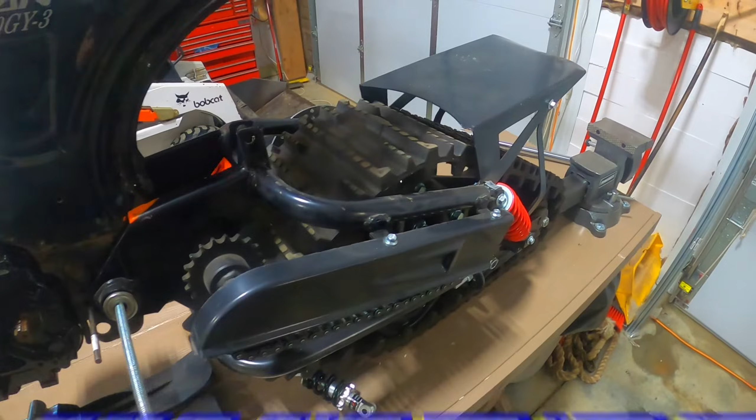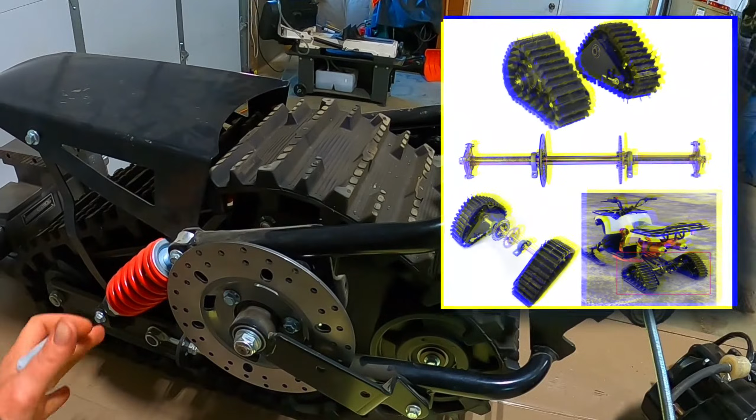So now, here is my new toy that I got. Yeah, I'm not seeing a lot of these online. I think I kind of lucked out. I was planning on taking one of those snow tracks off of a go-kart. I think Grind Hard Plumbing Company did that with their Barbie car.

I was about ready to build a swing arm pretty much exactly like this. I kind of had it in my mind. This is exactly what I was seeing in my head, how I wanted to build it. But as I was going to order that guy, I found somebody already made a snow bike kit for the little kids 110, 125cc snow bikes.

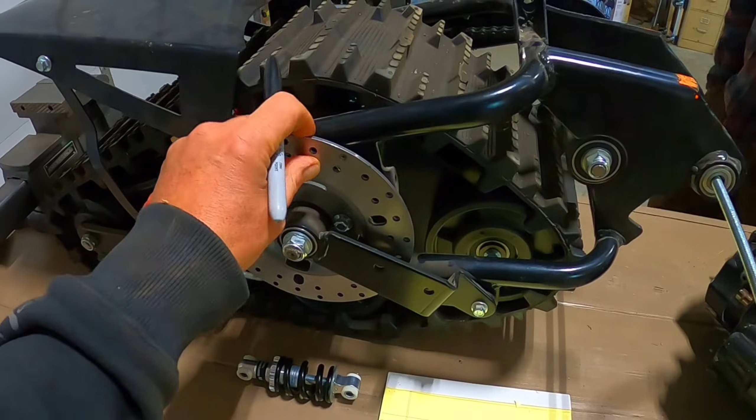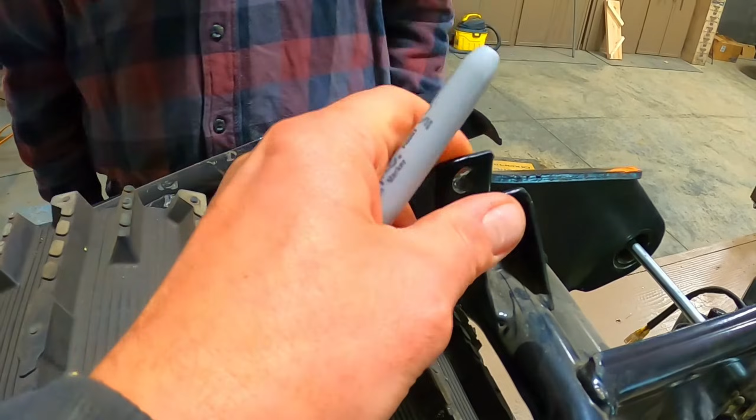So what do you think, this guy here? Well, it looks like it's made in China. Yeah. But, you know, it looks serviceable. These welds aren't good, and this bracketry for the monoshock is just a little light. The fender comes pre-bent, I see. Yeah, it came off the slow boat from China, and it was laying inverted, so all the weight was on the fender, so this is all bent up. But yeah, nothing we can't fix.

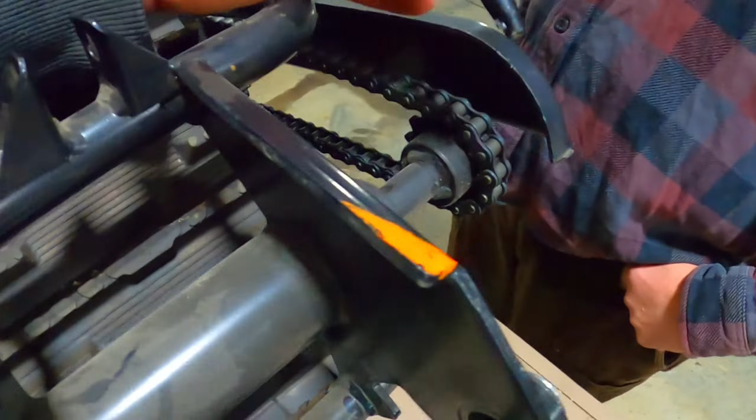It's kind of cool. Got a nice little disc brake here, little shocks to, oh, it looks like to give the snow track a little bit of flex. Here's your tensioner for the thing. It's got a jack shaft built into the guy with some gear reduction, so this guy will come off the sprocket on the engine and drive the jack shaft. Let's get around to the other side and take a look at this thing.

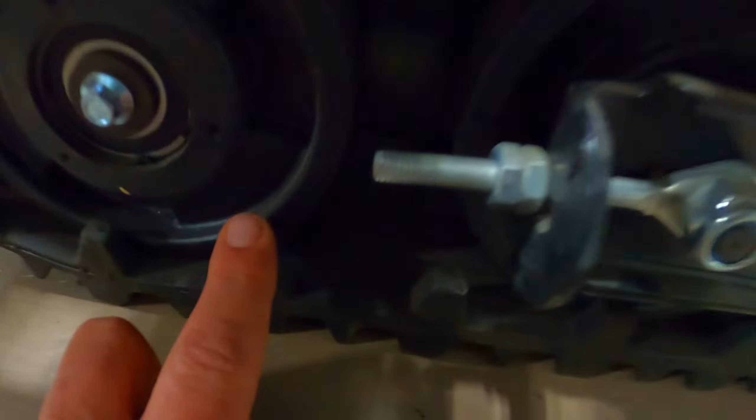Yeah, that's what my buddy was saying. Yeah, it looks like a pretty good design because there's 1, 2, 3, 4 rollers. Here's a tensioner between these 2 rollers to tension the belt. And these big old knobbers down here. So we don't think we have to worry about this tread ever falling off.

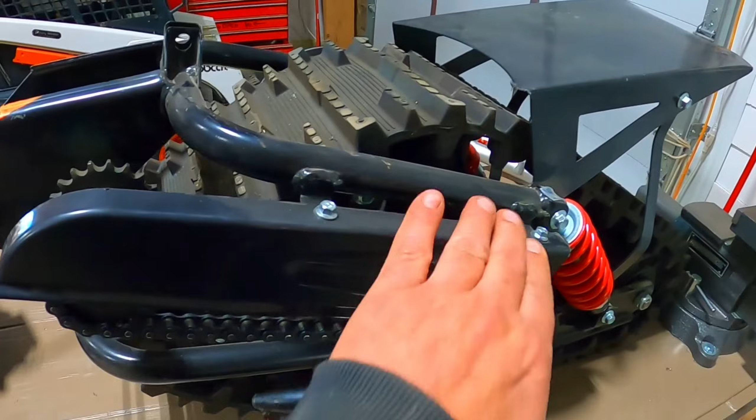So it's got an iffy little chain guard right here. I'm not sure about this. I might make my own new chain guard here and cap this in, because I don't want the chain breaking and blowing my leg up.

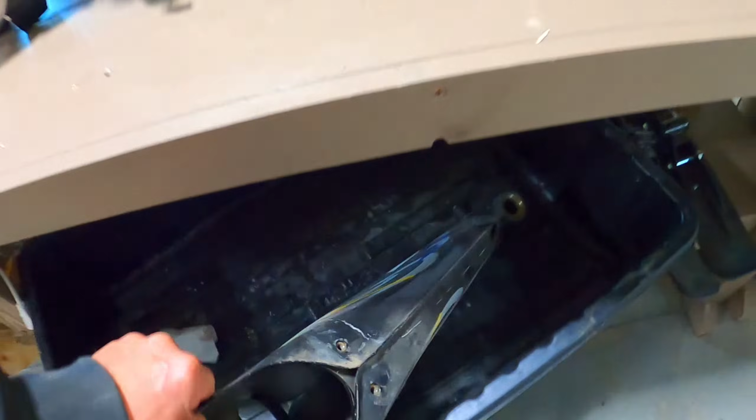So the plan here, instead of making like a Timbersled or a full-size snow bike, I'm going to do this. I have this knockoff Trail 70 frame. It's a Lifan LF110GY-3. That's a heck of a name. So I stripped this thing out to build my 1972 Honda.

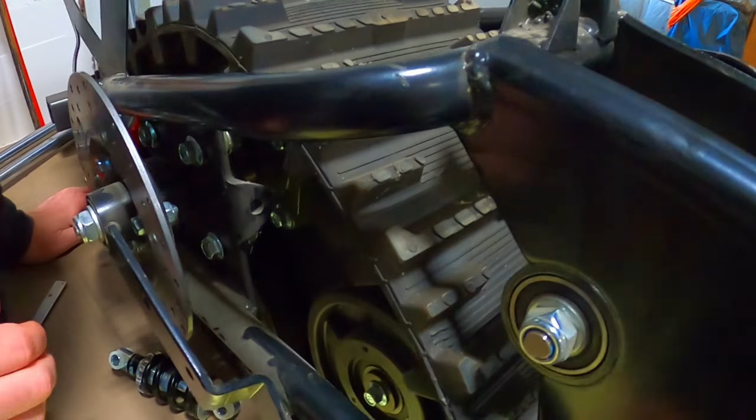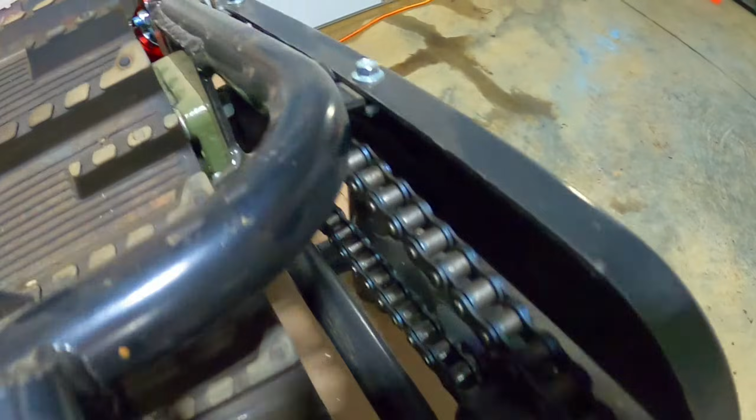What'd you find out there? Well, I was looking at this shaft running through the middle here that runs the disc brake and comes off the jack shaft. Okay, so the brakes are actually on the jack shaft itself. And this side has a tensioner to tension up this chain so you don't get flop in it. But on this side, it's solid, even though there is a space to put a nut through there. Oh, they probably use the same bracket on both sides, same tooling. Oh yeah, I can see the tensioner right back there.

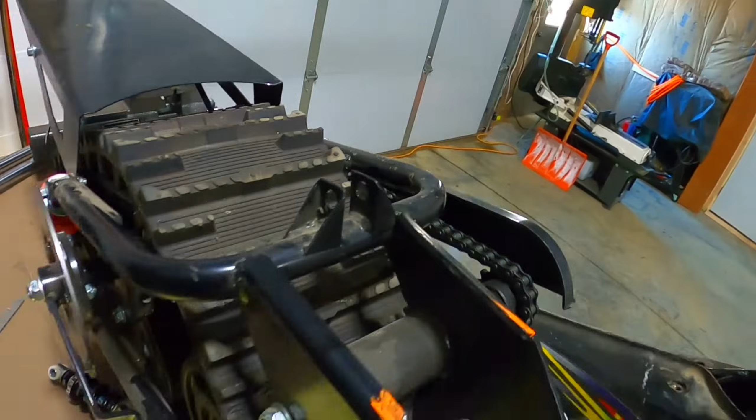Neat. So yeah, definitely want to keep that chain maintained, or maybe put a decent chain on there, because if that's the brakes, I don't want that to go snap and have zero brakes. Zero brakes. I got to figure out what kind of caliper I want to use here. Do I want to use hydraulic or just a mechanical cable? I like mechanical cable. I think so, because then you don't have to contend with leaks.

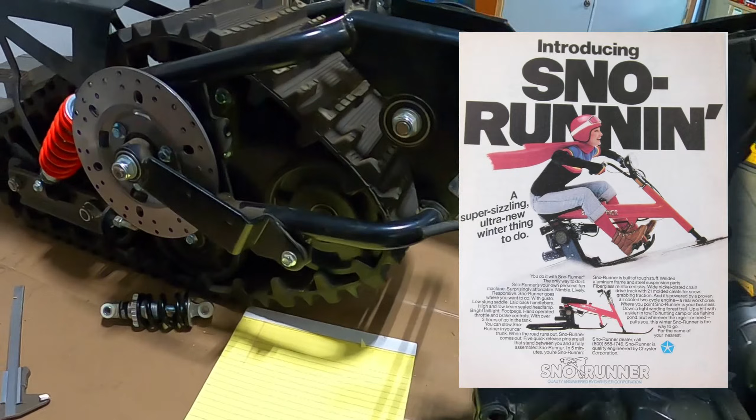And the thing is, this thing's not going to be like a 50-mile-an-hour machine. It's going to be a little putzer thing, kind of like those Chrysler Sno-Runners, just a bigger version of that. So I think what I'll do is see if I can find something off a kid's pit bike, mechanical caliper, maybe actually even 2. I could probably mount one here and one down there, so I could have a handbrake on both sides of the handlebars, a little bit of redundancy.

Oh, and the motor. This is kind of a funny story. Dad was at the dump, I can't remember where it was, and this was just kind of laying there. So we got this thing for free. He brought it home, wasn't getting any spark. So we pulled off the side cover here, and the stator, I think, grounded out to the flywheel because there was a big old spark and burnage inside there.

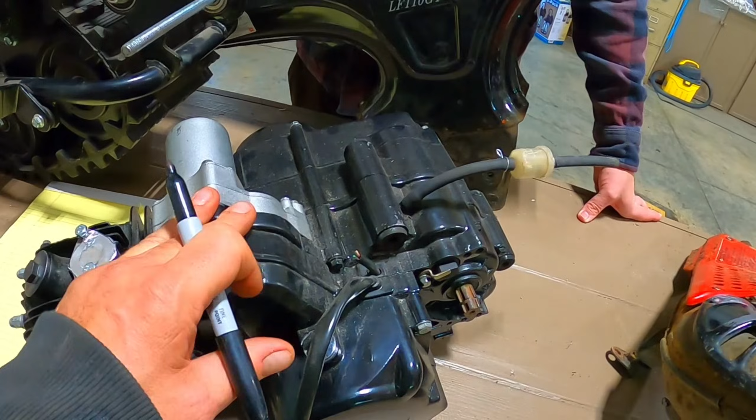So all we had to do with this thing is put a new stator, new flywheel on it, and we got a free 110cc electric start engine off of, I'm assuming, a kid's Chinese quad. And it's kind of funny. It's a single speed forward and reverse. So that's all it's got. So I think it's going to be perfect for this thing because we're not going to want to go 50 mile an hour on this little thing.

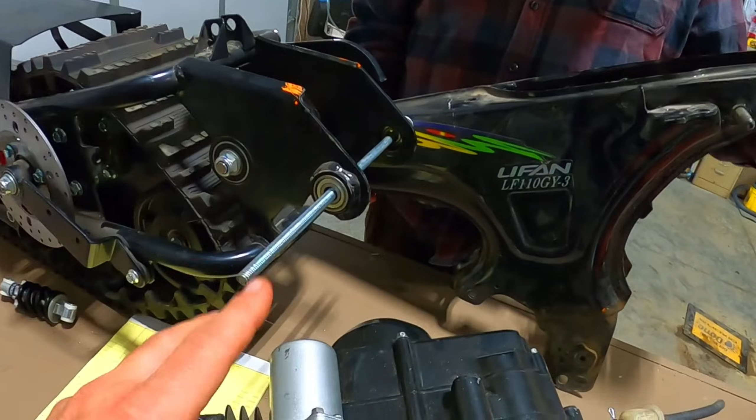So I think first step, I'm going to use a single speed engine on here and use it as a test bed. And down the road, if I want more gears, I do have a couple more Chinese Lifans. I think I've got a 4-speed semi-auto 125 and a 4-speed manual clutch 110 I might put in it. But for now, the single speed is going to be the test motor. I think it's going to be the perfect fit.

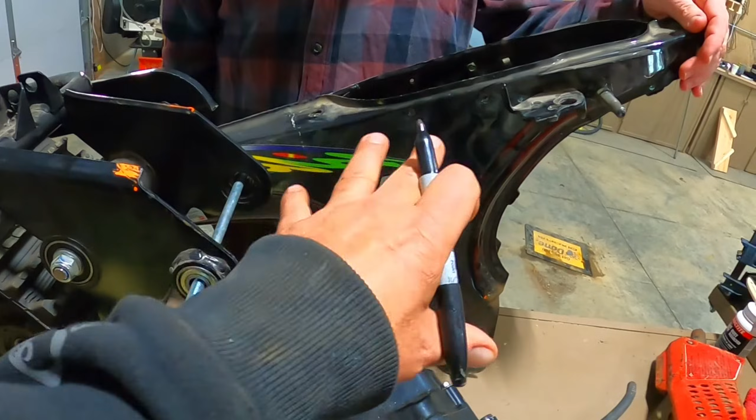All right, so let's take this little carriage bolt here, it's our swing arm pivot, and let's walk through this whole thing and see if we can get an inventory of all the parts I need to order.

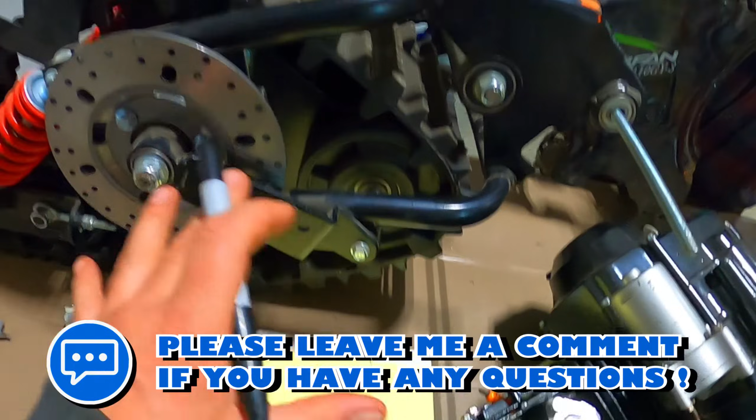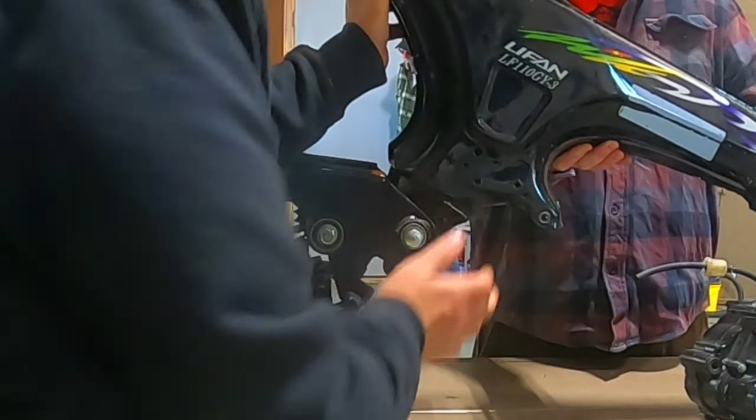Oh, look at this. Oh, I think a couple washers in there to shim that out, and we're gonna be in business. Installed. All right, what do we got here? Just a couple pieces of rod. Now, I will lift the motor up. If you can put those rods in here, we'll see if we can get this guy.

I will do it. You know, I love getting these things into these stamped frames. It's so freaking easy to do. Oh, there we go. I think that's good enough for today. And watch the whole thing come crashing down. Yeah, look at this though. I'm thinking I might keep this frame black, the engine black, and the swing arm black. This might be pretty sharp.

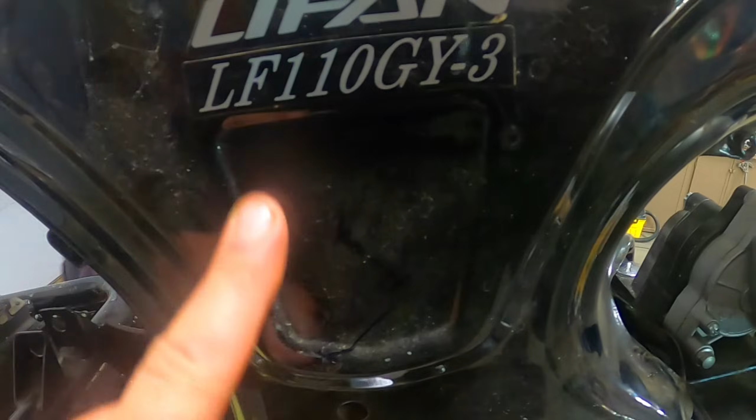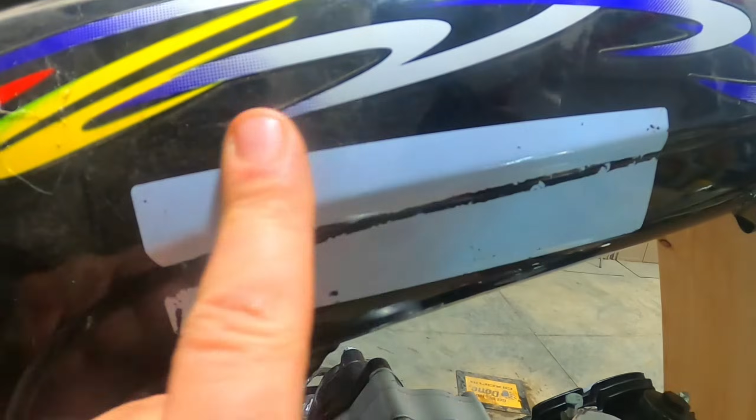You know, on the Honda Trail 70s, they have this badge right here that says Trail 70. I think I'm going to make a new sticker for this that says Snow 70. I'll say Honda Snow 70, kind of like a K1 Trail 70 decal up here. That should look slick. What else?

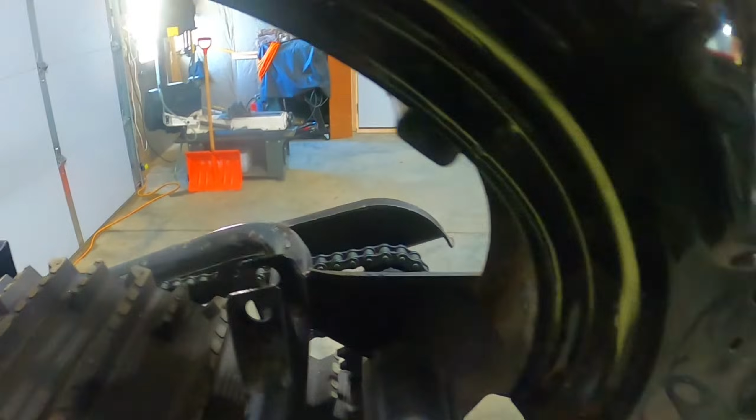Oh yeah, you can kind of see right here, this part on the swing arm hits the frame. So I'm going to have to grind, clearance this away so the thing will swing freely. I'm trying to figure out if I want to do a normal shock off the side and put a mount here and just have the outboard shocks, or if I want to do a mono shock on the inside.

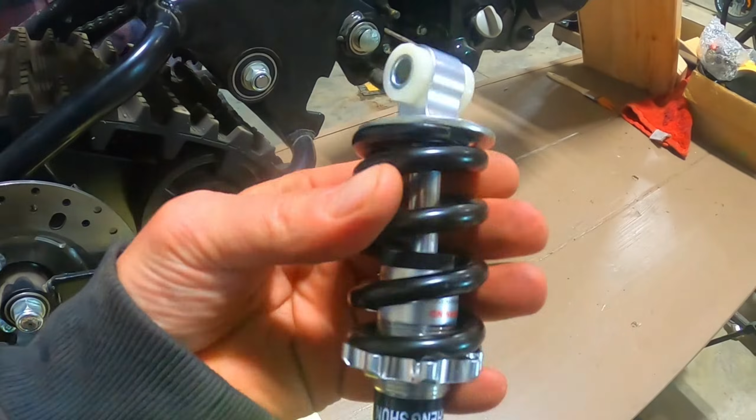What would you think? I don't know, man. You don't know? I like the mono shock idea. It looks sexy. I think it looked pretty cool. But the problem is trying to find one short enough. I bought this little guy on eBay, and this thing scares the crap out of me. It would fit in here really nicely, but this thing is so lightweight. This is going to explode. This is going to come flying up, and then injury or death is going to occur. So we're going to scratch this idea.

I'm going to have to figure out something else, but maybe rebuild this bracket, move it back or something like this, and find maybe like a 6-inch long shock.

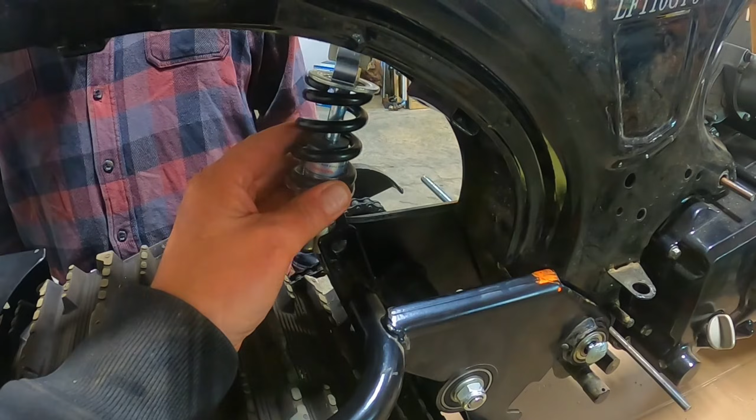So one question I have on this thing is, where do I want to angle the tread here? I don't know anything about snow bikes or timber sleds or anything like that. Do I want to have this tread kicked up a little bit so it climbs the snow, or do I want to angle it down so it digs into the snow, or is it even? So I'm trying to figure out what angle this needs to be at. If you have any suggestions down below, I'd love to hear.

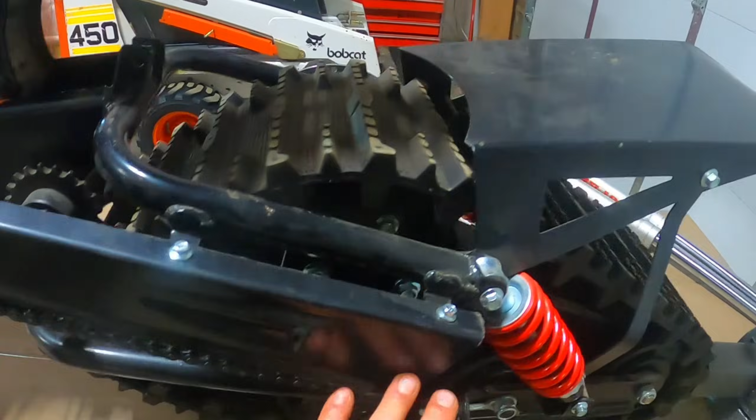So what I'm going to do to make this angle of the track adjustable, where did I set that little shock? I think I might cut this bracket off here and make an adjustable bracket to mount whatever I'm going to use as a shock, so I can adjust this in and out to adjust the angle. So basically I have like 3 points here where I can move the shock forward and back like this to adjust the angle. And then through trial and error, we should be able to figure it out.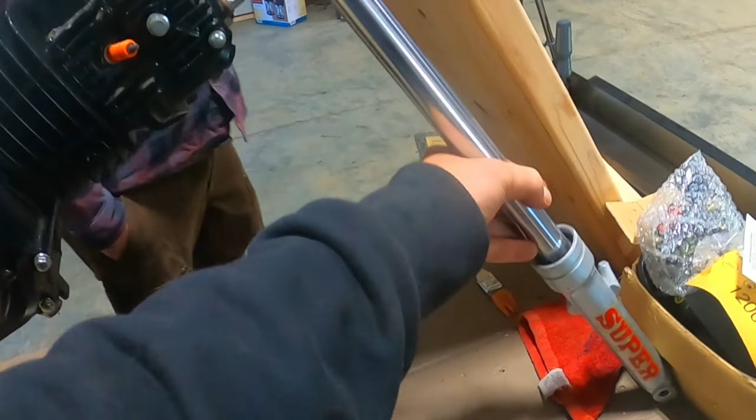So now, front forks. Haven't figured this out yet, because these are the forks that came off the knockoff Trail 70. And even though they're super, they aren't quite the right length. You can kind of see right here, not even close. So we're going to have to find something off of a bigger bike that will fit on here. And my thoughts were, my XL100 that I made a few weeks back, this video right here.

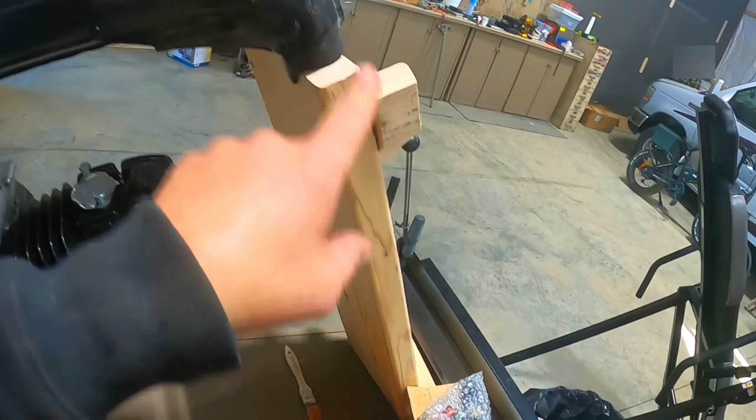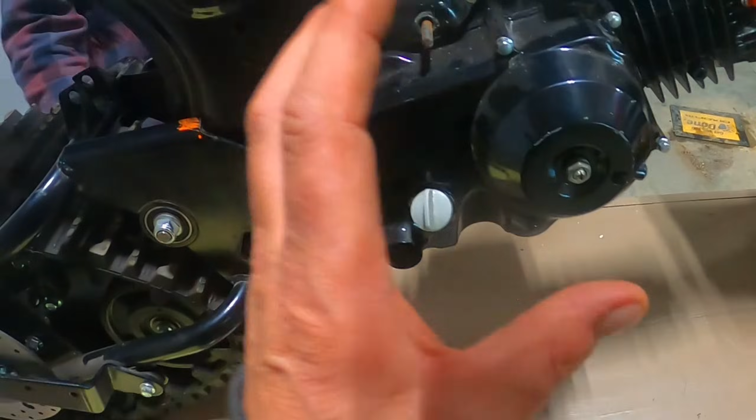When I was building that bike, I threw that XL100 fork on here, and it was just about the perfect length. So a few weeks back, I scored a 1975 XL125 that I was going to scrap out and use the forks for, but the thing ended up being so darn nice that I think I'm going to restore that guy. So I'm still in the market for another XL125 or XL100 fork.

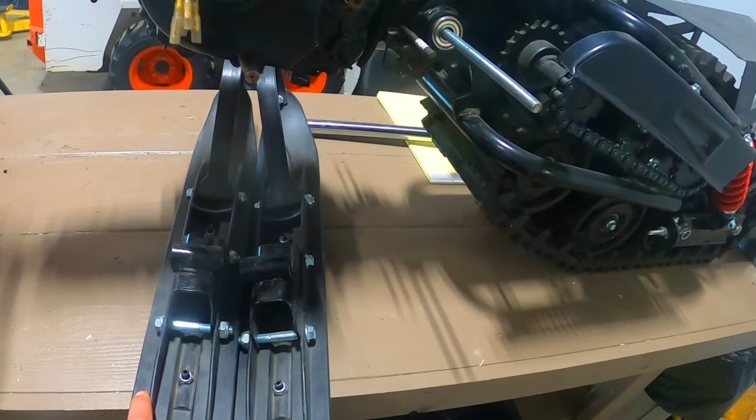All right, so here are the skis that came with it, and this came with a piece of bracketry. So they wanted the skis to be outboard a little bit like this, and there's kind of a hoop that went over here, but I don't want to do that. I want to make this a mono ski, kind of like a Timbersled or a normal snow bike. So my thoughts are I can put these two together like this, cut a piece of pipe, another piece of pipe, third piece of pipe, and run a long bolt through all three of these.

I'll probably need to put a piece of pipe here, here. That's fine, there's already one there. And then clamp them together like that. Put a piece of pipe here, and then our front axle will go through here. I might need to trim, clearance this a little bit, depending on the width of the fork tubes on the fork I get, but this should make a really nice mono ski on the bike.

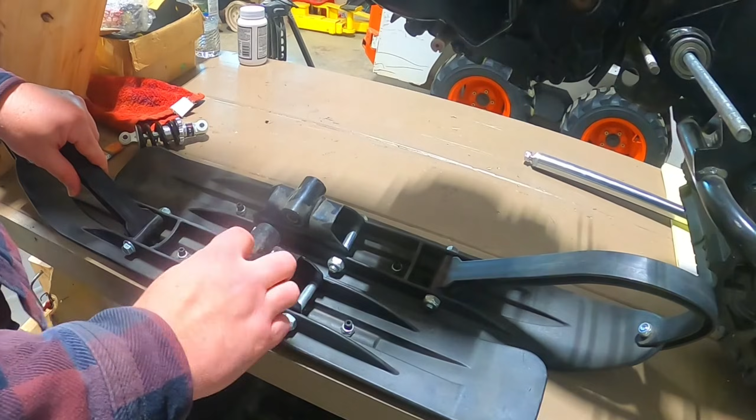So really, though, the distance between these two when the shocks come down kind of relies on the triple tree as well, right? Yeah. So the triple tree combined with the actual size of the shocks will determine if you need to do any trimming or not. Yeah, I think at this point, as long as the fork tubes are about 31 to 33 inches, I'll be fine. I can always make some kind of standoff bracket to raise this up or lower it down, but I think a mid 70s, late 70s XL100 or XL125 triple tree and fork should work just about perfectly.

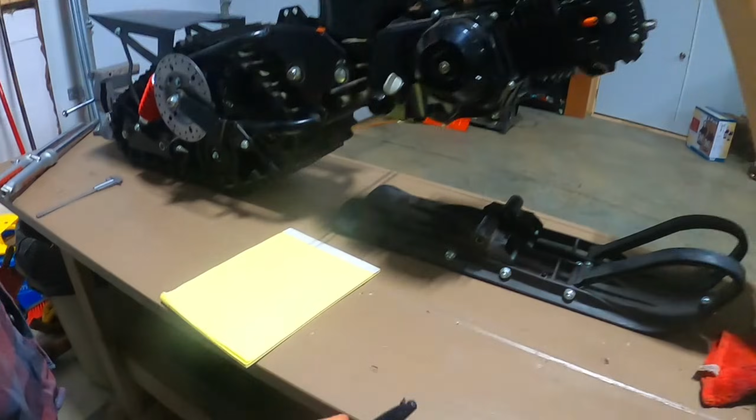So I think I might need to bite the bullet and hop on eBay and grab myself a triple tree and fork tubes off a XL100 or 125, and then we'll be in business. Okay, we're gonna take a little inventory of what we need to order here.

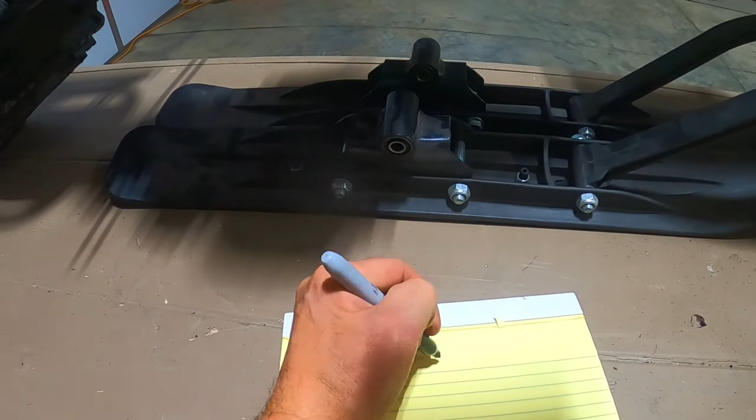But yeah, first thing, I'm thinking we need a mid 70s XL100 fork. And triple tree. And handlebars. Yeah, triple tree. Oh yeah, I never thought about that because I was initially thinking about using the fold down Trail 70 handlebars, but if that top fork bridge isn't the same width as the XL100, I'm not going to be able to use that. I might have to put standard motorcycle handlebars on there.

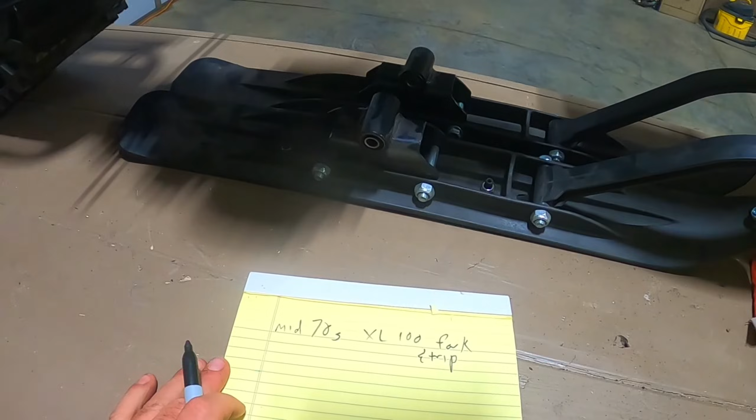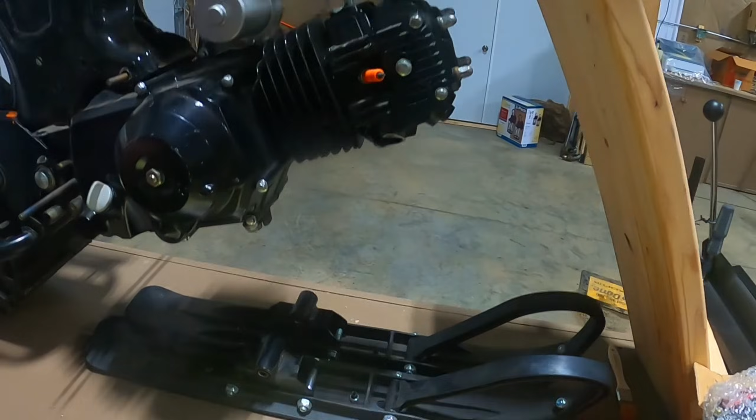I think I'm just gonna bite the bullet and say that the fold down Trail 70 handlebars aren't going to work, and we're going to go with standard pretty high rise motorcycle handlebars. And you might want that anyway, because with the Trail 70s you don't have hardly any torque. You're right. We want wider. You're going to be turning skis instead of a tire. Oh, speaking of that, I'm thinking we're going to have to adjust this steering stop so you can't turn it very far, just enough so you can lean the bike, because you don't want this thing to go sideways. You're going to go woo.

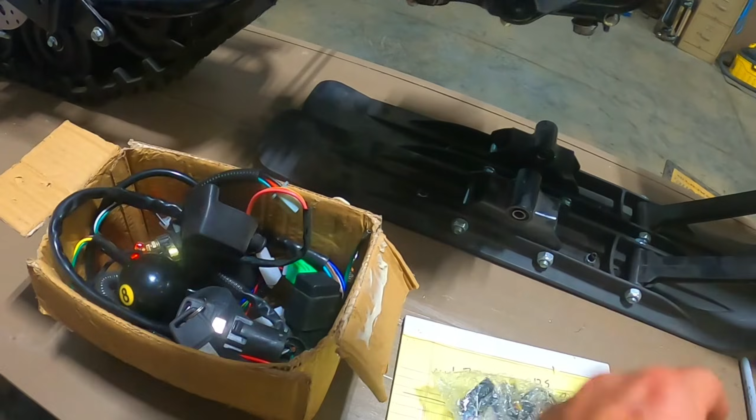Okay, so we've got XL100 or 125 fork. You're going to need a full wiring harness for this thing. Oh, crap. Well, no. Thanks for reminding me. I already bought a pit bike wiring harness. So this already comes with a key, starter relay, handlebar controls, CDI, full wiring harness, and a coil.

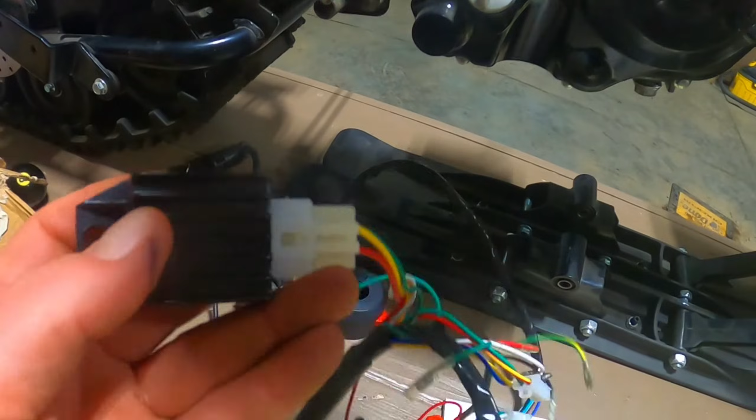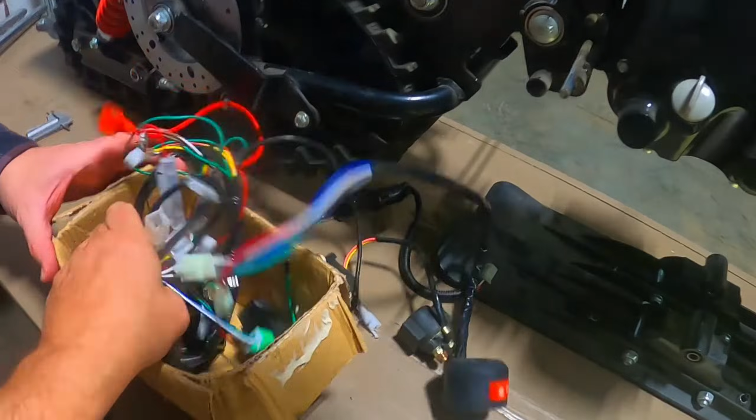Wait, I'm missing one more thing. Charging, the rectifier right there. So yeah, this thing was about 19 bucks on eBay for everything. Comes with a generator as well, or stator, so I'm not gonna need this though. But yeah, wiring, done. I may want to get a cool handlebar control that matches the bike once I'm done, but we'll take care of that once we get to that point.

So what else do we need on this guy? What's this hole for, Jason? Oh, there's a grommet here that the wiring harness comes through the frame, out there, up to the handlebars. Got it. And on the other side, you can kind of see through here, the ignition key goes on that side. Okay, the key goes on that side. Yep.

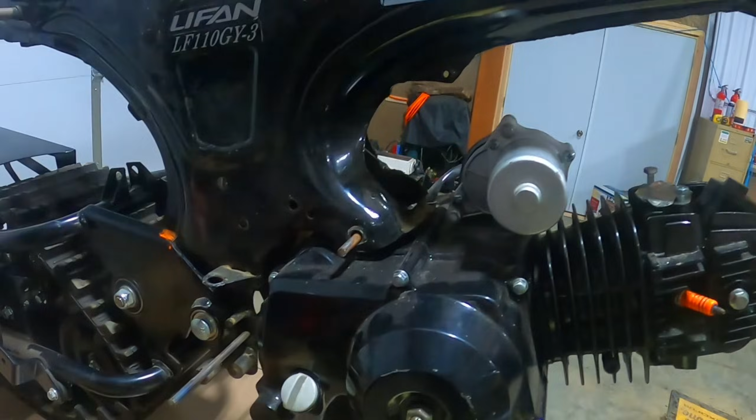What's the width of that disc? It says on the disc 3 millimeter. I measured it. It's somewhere between 3 and 4, but I'm assuming that they want a 3 millimeter gap in the caliper. So we need to find 3 millimeter calipers. So let's say 3 millimeter manual cable brake caliper.

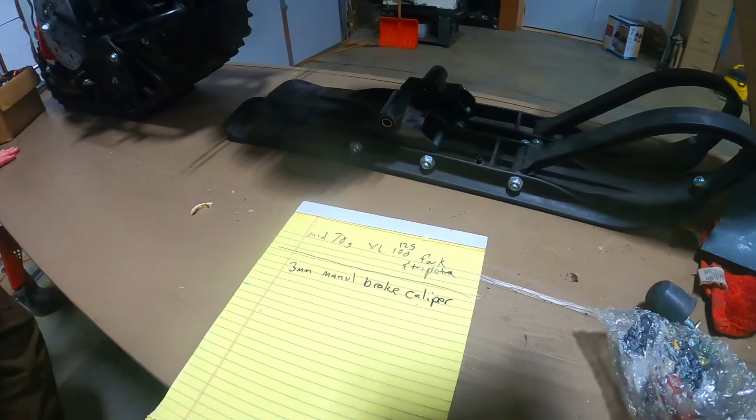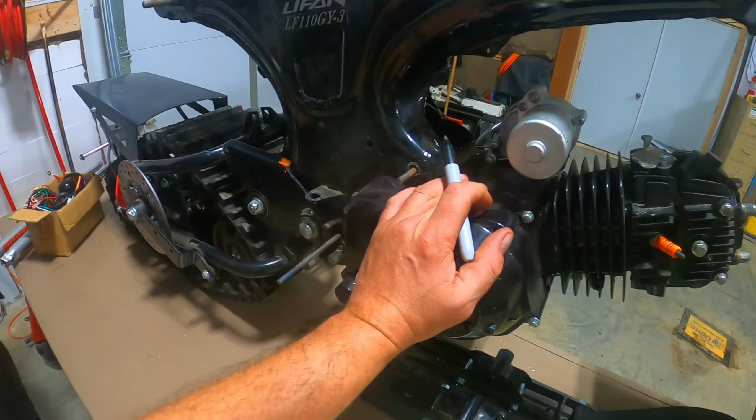Can you get that on like a fancier, you know, mountain bike, or is that something that comes on like those little kids pit bikes? Should be fine. Most of them are hydraulic, but I think I've seen some just normal cable pull-ins, and I think I want the cable versus hydraulic because we're not going to be burning rubber, burning snow with this. We're not going to be going too fast, so I think mechanical is fine.

Maybe I could put one above and one below, so we have 2. Yeah, your left hand could be this caliper. Your right hand brake could be the other caliper. Oh, since we're at that, so 2 brake levers. Not going to worry about foot brake because you're going to be wearing big boots anyway, so it might get in the way. We'll just use the hand brakes.

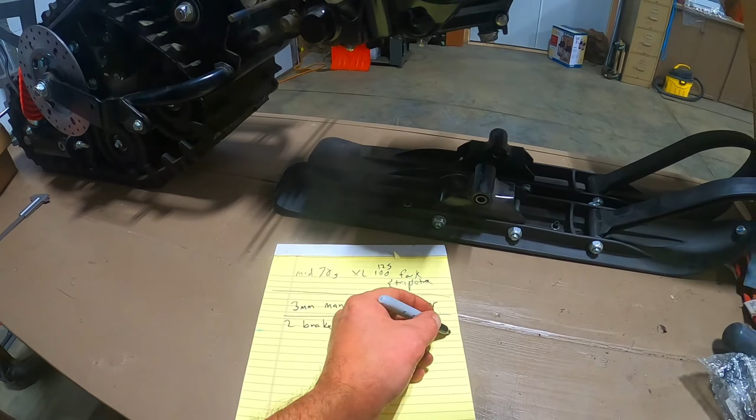What else we got? And also, when you get off of the throttle on this thing, there's so much drag, it's probably just going to stop you instantly. I think so. Yeah, it's going to be funny with this 110. But there is gear reduction in the jack shaft, so I think I'm just going to keep it geared how it is. And if need be, I might get a different output sprocket on the engine to either speed it up or slow it down. But like I said, we're going to have to play with that as we go along.

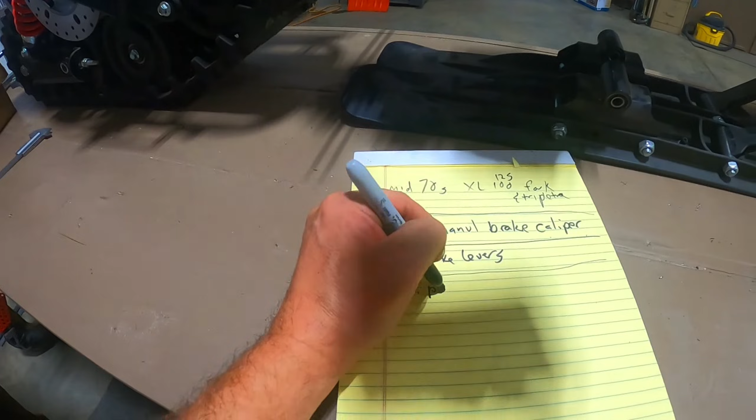So, brake levers. And since I stripped this entire bike out to build my 1972 Honda, I'm going to need a seat pan and seat, Harbor Freight seat, pan and seat, gas tank. Oh, what, handlebars, grips. What else? Let's take a look.

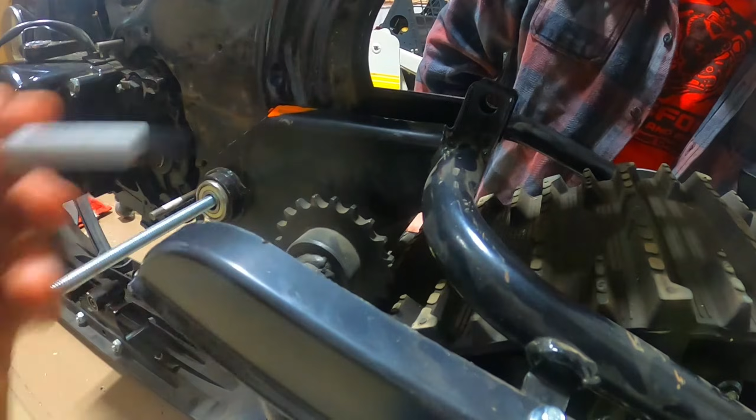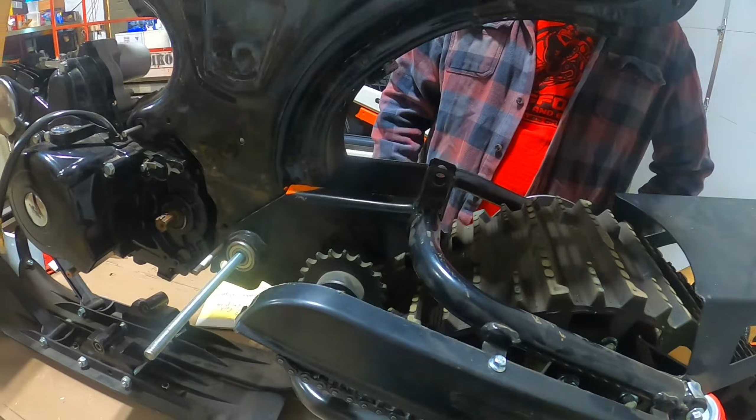Not a lot of room there between the tread and the chain, but you know what's going to happen? It's just going to eventually cut a groove out of there and self-clearance itself. Not a problem. We're fine. So headlights, I don't think I'm going to put headlights on, so don't worry about that. I guess I could put a headlight. Nah, in the first handful of videos, we'll just get this sucker running, and I can tackle that at a later date.

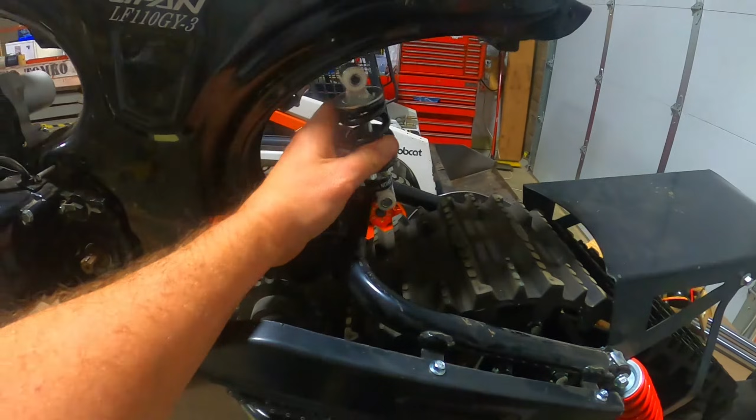What about here, Jason? What's that? Oh, did you talk about this? I'm gonna have to figure out what I want to use for that. Yeah. So I think I found a shock, a little heavier duty one, kind of like this, but it's 5 inches long. I think I'll have to weld a bracket here for the top shock mount and wherever I want to put it here.

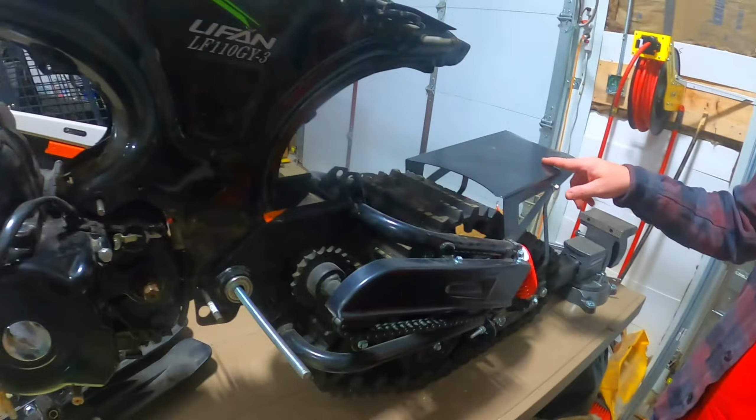And if the spring rate on that shock I buy isn't strong enough for one shock, I might just put bam one there and bam one there, inboard like that, so it still kind of looks like a monoshock, but there's 2. I think that'll work. Are you going to turn this into a seat and put a little pad here so somebody can ride on the back with you? Oh, that's just a great idea. I think pant leg right in there. That's just, I love it.

Hey, oh, I just noticed that's a pretty awesome shirt, huh? It's a very nice shirt. Yeah, you can't get these anywhere. Maybe someday, folks. Maybe someday.

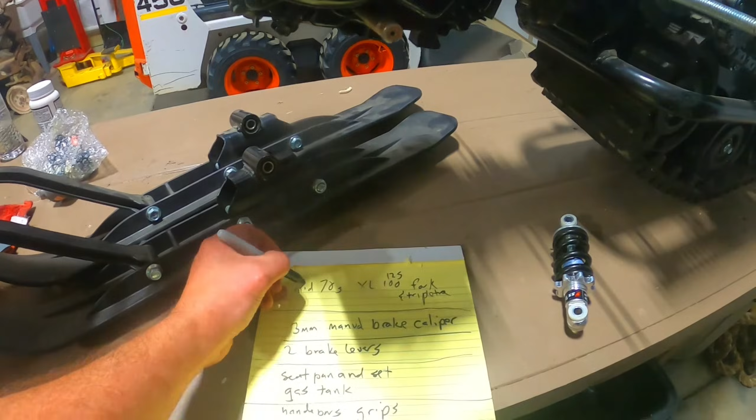What were you asking? Oh, so I was looking here, I saw a keyhole. Oh, that's just a steering lock. We won't hook that up. No need to have that on there. No one's going to take off on this thing. But yeah, we'll figure out the steering stop when we take it for our first drive and we wreck it.

I have an important question. Yeah. But we should look at it from the other side, so we can stop it. All right. Let's go over there. All right. So what was your question?

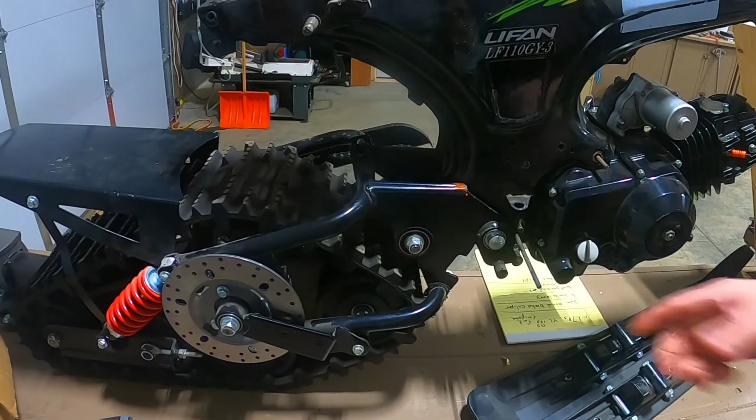So my question is, this is a snow bike. Yep. You run around the snow. You're going to have pant legs everywhere. And big boots. Lots of big boots. What are you going to do with it for exhaust? You're going to run it low? You're going to run it kind of up high? Oh, I never thought about the pant. You're definitely not going to want to use those vinyl snow pants. Those will melt.

I had that happen back when I was camping as a kid.

Actually, I've got, this is the heat shield off, but one of the knockoff Trail 70 mufflers. I think I'll just like that. Okay. Should just bolt up. Or wait, no, they're like that, aren't they? On these guys? I think they're up high like that. Yeah. It'll be kind of like that. I think it'll be fine.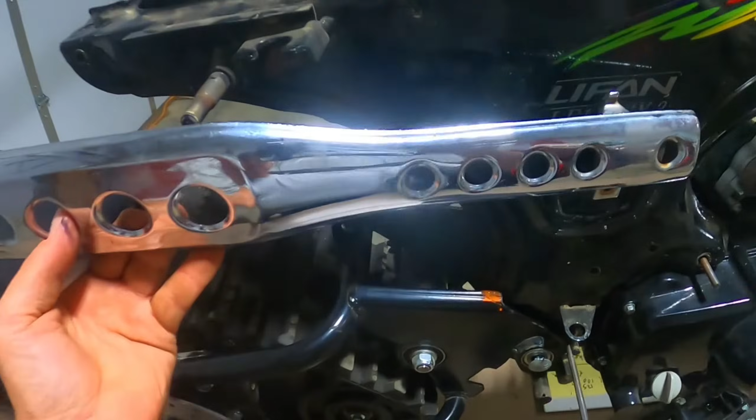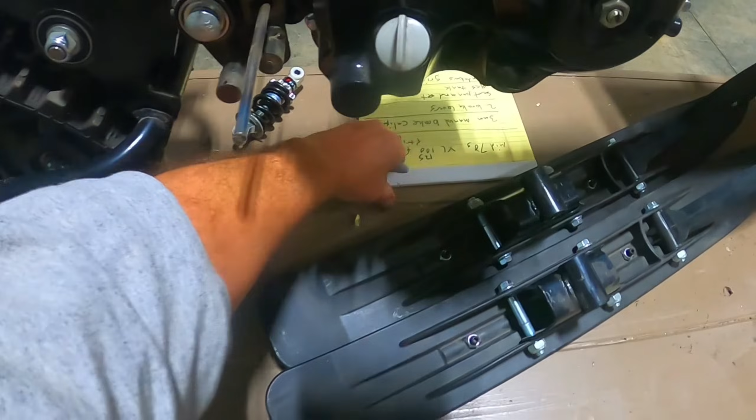I might need to make another heat shield on the top so you don't burn your pants and moon boots, but I think we'll be okay. We'll figure out the muffler when I get to it. But let's write that down. So we're going to need a Trail 70 exhaust.

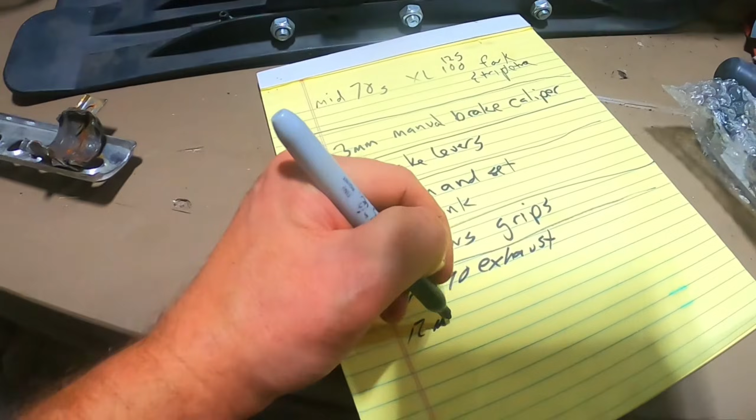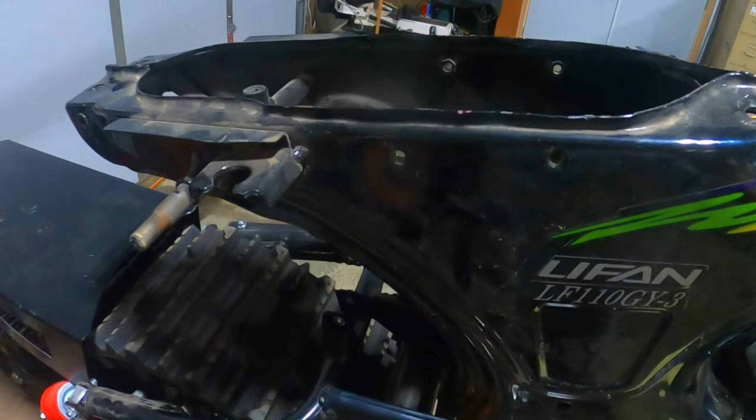But for your electrical, you gonna use the original battery location? Yep, for the electric start. I can make a battery box. I don't need to buy that. Well, by the time I make it, I'm sure those battery boxes off the Chinese knockoffs are a lot cheaper. So battery box. Did I write down gas tank? Yep, I did. So gas tank, seat, battery box, exhaust, brake calipers, foot pegs. Don't need a kickstand.

That's nice. Oh yeah, that kind of reminds me. We'll probably need to rig up some kind of something that this can sit on with some wheels, so we can move it around the shop and in and out of the car shows and stuff like that. Dolly. Yeah, dolly.

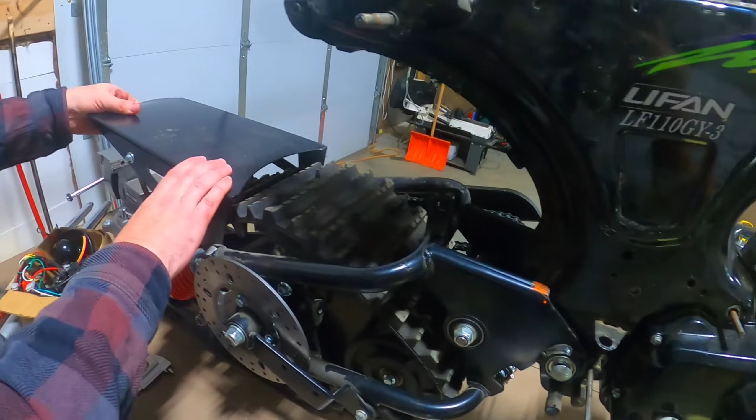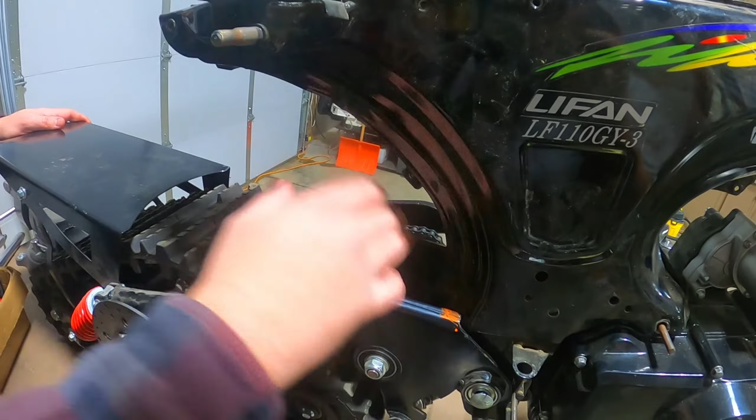So you got your fender back here, but it looks like there's potential for getting quite a bit of snow thrown up in the back of your legs. Yeah, I can see that. Maybe another fender, or extending this one, or making one. Yeah, I guess you could put like a plastic fender liner there. Or since this is all bent up, I might just remake this out of sheet metal and have it cover the whole thing back here. That might look pretty cool. Just leave this all normal here, little monoshock there, and just rebuild that fender. Yeah, I think that'll work.

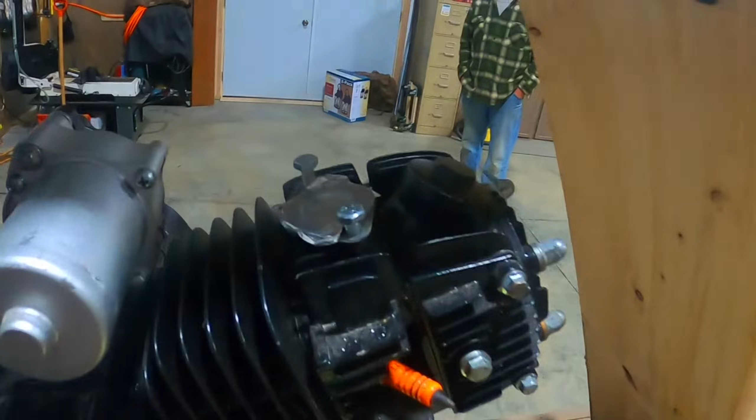So what other parts do I need to get this thing rocking and rolling? Carburetor. Yeah, probably get a new carb. Oh, it's going to need an intake. I might just get one of those universal intakes that you can put at multiple directions, since the starter's in the way of where the normal Honda air can goes. I might need to run it out to the side and have just a cone air filter right here.

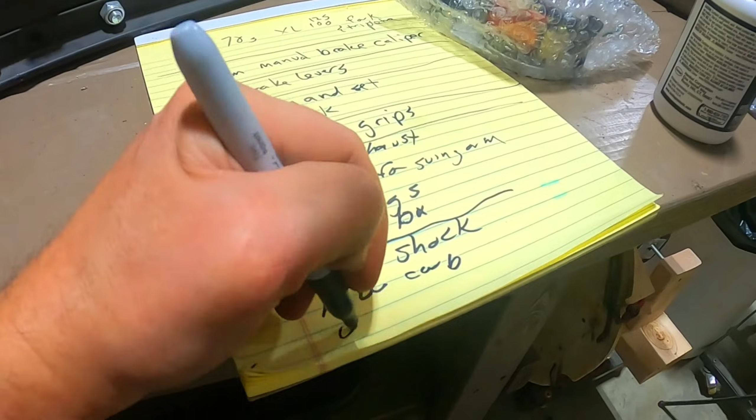What do they use for the pit bike or the quads this came off of? Universal intake. What was that again? I can't write and think at the same time. So they obviously solved the problem on the quad. It must just go the other direction. Yeah, I think they have them go forward. What else? Everything else I think I can fabricate. Yeah. I think we're good to go, at least enough to get it running.

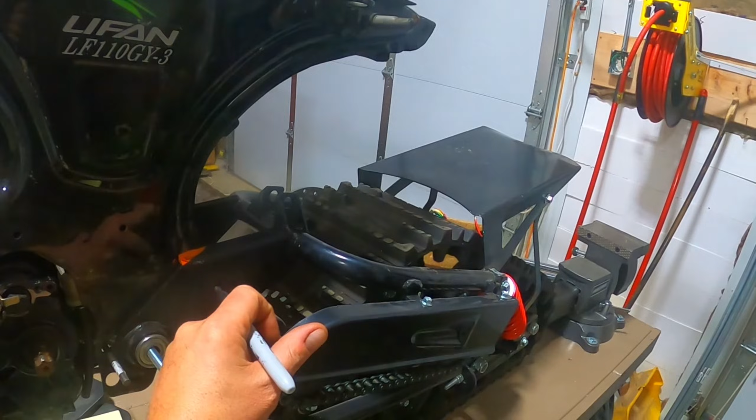Brakes, I won't be able to get the brake cables until I get everything built. I know where the handlebars are going to be, but for the first test run we don't need brakes. Brakes are optional. Okay, so I think we got a plan. Got an inventory of all the parts I want to order.

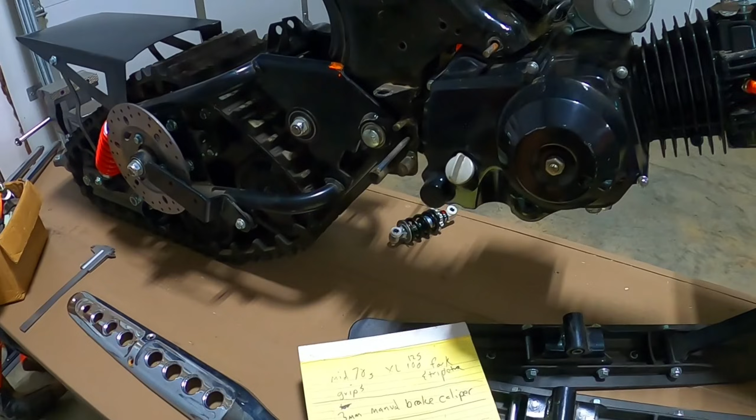So this is probably going to be a build. I think I can get this thing running in, if I have all the parts, a few weekends. Not going to take too much fabrication here. But yeah, this is going to be a sweet project.